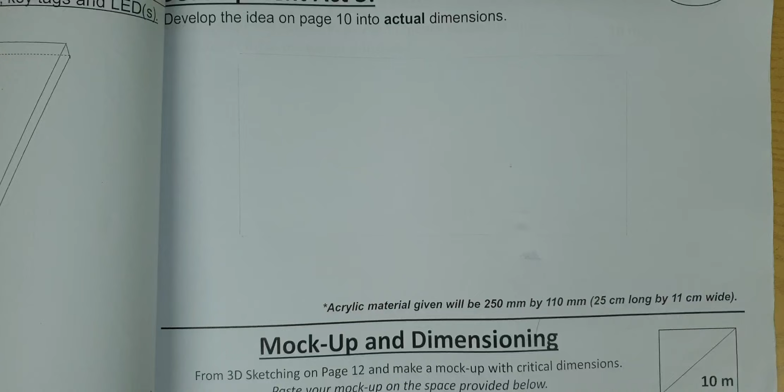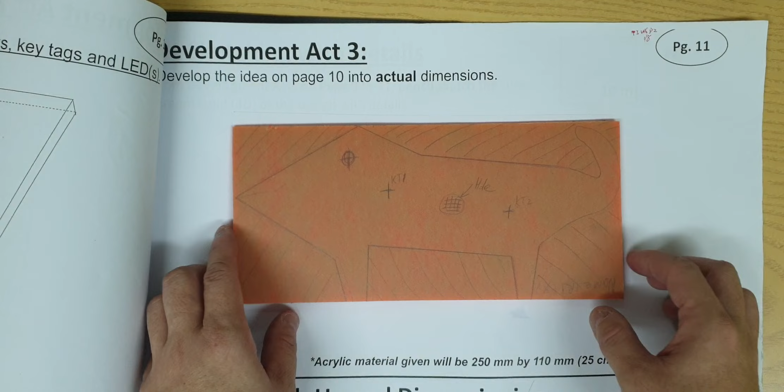Following the previous video, on page 11 you developed the idea on page 10 into actual dimensions, so you can consider using the acrylic and draw the outline. And of course, before you paste your mock-up on the back of page 11, you can use it to trace the outline of your confirmed design.

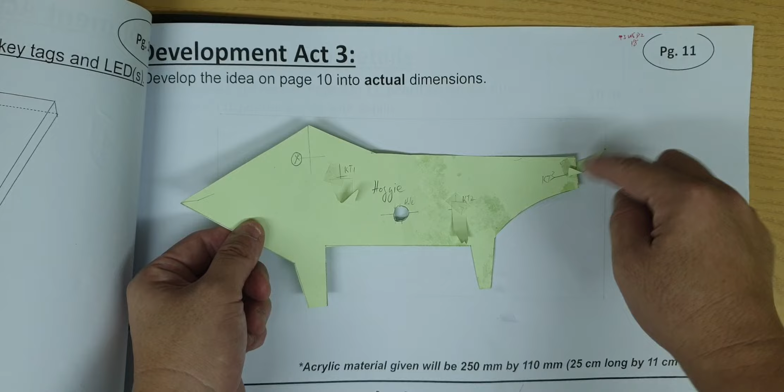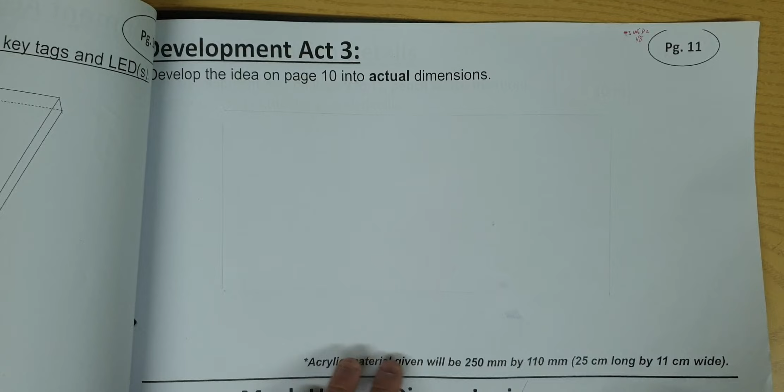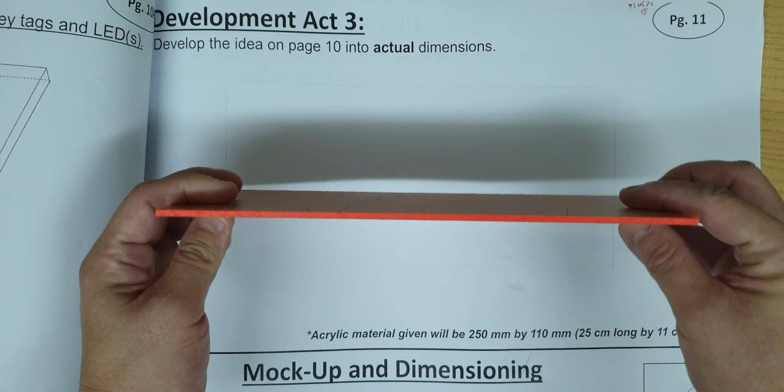So my tail here will change, and then your teacher will teach you how to do the proper dimensioning, coming out with the dimensions in centimeters or millimeters as you desire. So the acrylic given to you, the actual job piece or prototype, will be 25 cm by 11 cm, okay, by 3 mm thick. So 3 mm is 0.3 cm. Now as you have drawn this already, you can paste your mock-up at the back of page 11.

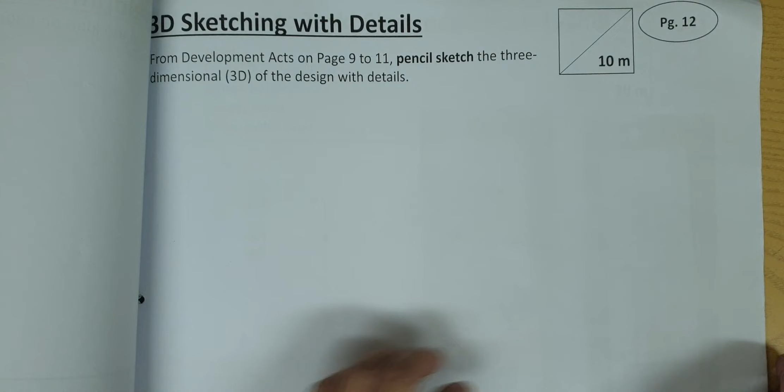We'll skip page 12. Now coming to page 15, you will need to fill up the steps in prototype making before you proceed to the practical workshop to make your actual prototype. This document here allows you to see in your mind's eye or imagine when I do this, what do I do next, or how should I start, what kind of equipment I will need. Alright, so basically you have a big picture of how you go about making it.

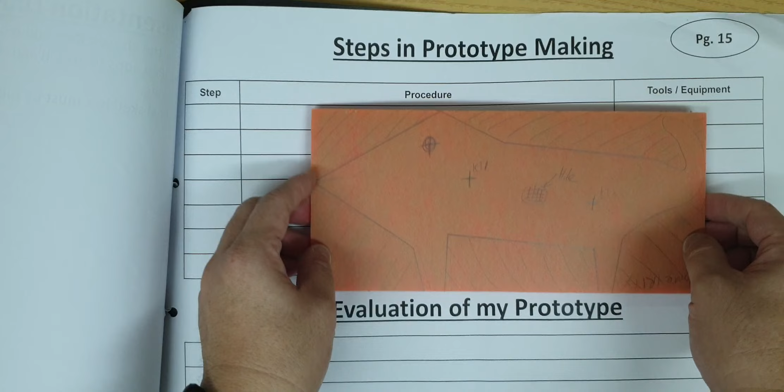So the broad steps will take up about 4 or 5 lines in general, because it's a simple piece of job. So normally we start with marking out, and then of course even the hole positions and things like that. The next stage is cutting. You cut out, and you will not be surprised when you cut out using the scroll saw or your hands, your normal saw, coping saw and so on, you'll find that the surface on the edge is very rough.

So the third stage is usually you shape, and we usually shape by using files, hand files, sander, the electric belt sander or disc sander. Your teacher will teach you, and of course it leaves a finer surface. But you want to do the next stage of finishing for the edges, for the surfaces. So you need to smoothen it with a certain grade of sandpaper. For acrylic we use the wet and dry or waterproof abrasive paper. The teacher will show you.

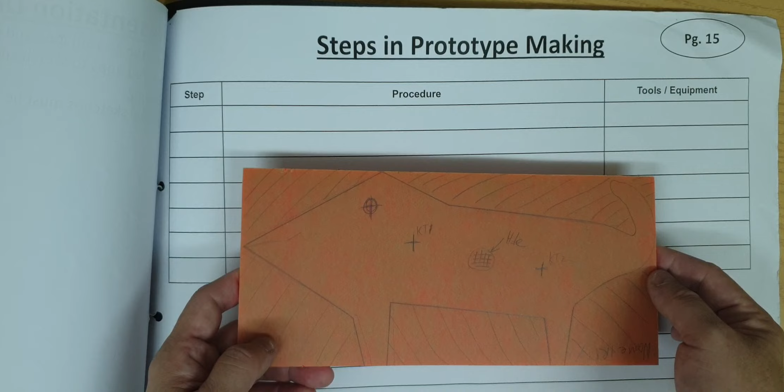And finally you have to do some assembling. If you have parts like the J hook and stuff like that, you need to do that. And for your J hook, you are required to use a strip heater, which is a heating element, to actually soften the acrylic before you bend, wearing your gloves and using some molds or formers your teacher will provide you.

Of course, for some of you, you will need to drill holes, so you probably will use the drilling machine or the bench drilling machine to drill the right size hole for your LEDs or for other size holes. So for acrylic in general, if you want to drill a bigger hole, you need to have a smaller twist drill bit to start the pilot hole. Pilot hole means the very first hole, and then you change to a wider size twist drill bit, so that you do not use a big twist drill bit and drill through, because it will crack the entire surface around the acrylic. So this ends the short video.